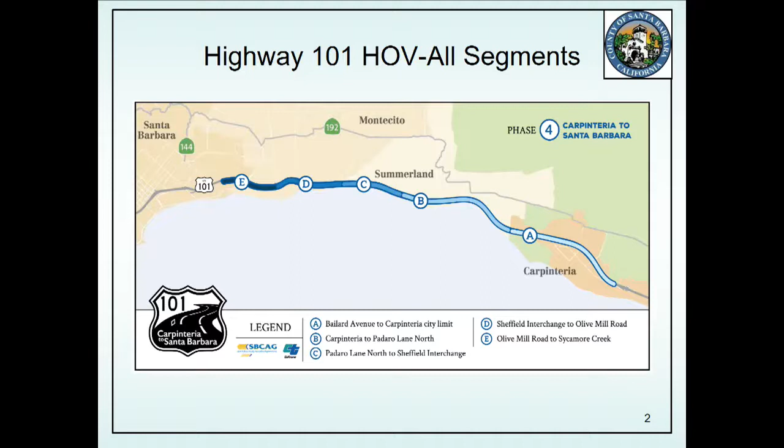Thank you. So I see we have staff here, and that would be our next step for a staff presentation. Good morning, Chair Bridley, members of the Commission. I'm presenting the Highway 101 widening project today. The project consists of two segments, specifically segments B and C of a larger Highway 101 widening project, which extends from Bailard Avenue to Sycamore Creek. So what you'll see on the slide here is the full extent of the Highway 101 widening, but today we're looking at just segments B and C. The project includes the addition of both north and southbound HOV, or high occupancy vehicle, lanes from the City of Carpinteria boundary heading southbound and just past the Sheffield interchange heading northbound. This slide shows both segments B and C.

The purpose of the proposed project is to increase roadway capacity and to reduce peak hour travel times. Currently, motorists experience 2 to 4 hours of delay during peak travel times, and that delay is projected to reach up to 10 hours by 2040.

The project also incorporates bicycle and pedestrian improvements to support multimodal travel and coastal access.

Widening of the highway will occur almost entirely within Caltrans' right-of-way, and the widening will occur either inward towards the center median or outward from the existing travel lanes in order to preserve ocean views and vegetation and to minimize grading to the maximum extent feasible.

The Highway 101 widening project was conceived of more than 20 years ago, and over the last 20 years, extensive outreach, including over 100 public meetings, have occurred in order to garner public input.

The project is a key component of the 101 in Motion plan, which consists of multiple elements that together would implement a multimodal strategy to accommodate future travel demand while facilitating a modal shift to carpooling, transit, and passenger rail.

In 2019, the Board of Supervisors approved a local coastal program amendment to address wetland impacts and policy inconsistency that was known would occur as a result of the 101 widening project. The amendment allowed for the project to encroach into wetland and buffer areas in exchange for a number of balancing projects that would improve coastal access and pedestrian and bicycle facilities.

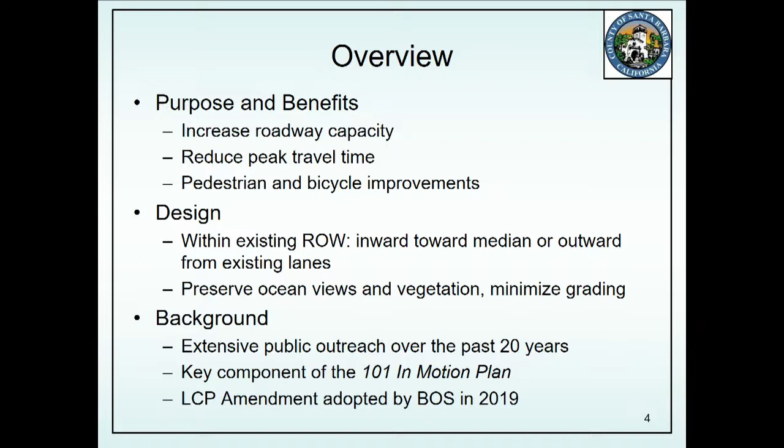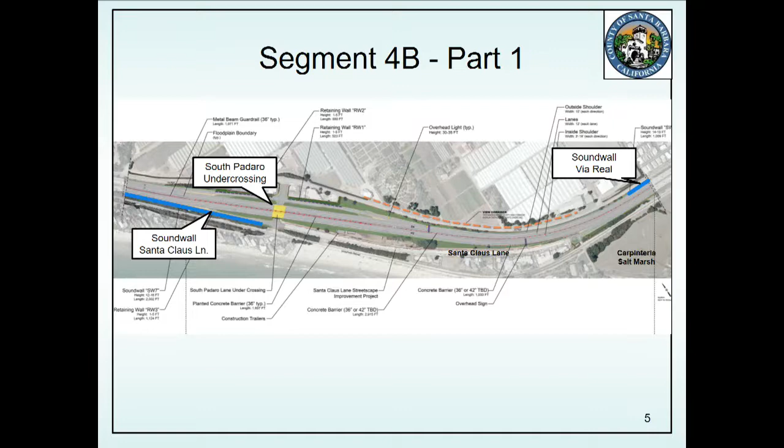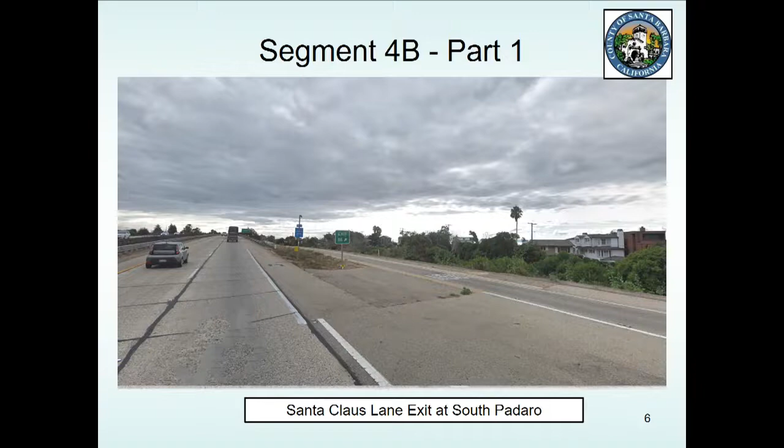This slide shows the proposed design for the South Padaro undercrossing.

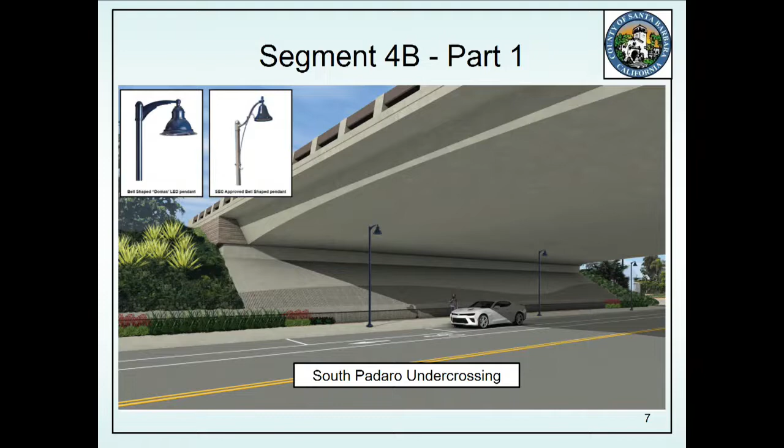In the next portion of segment 4B is the Arroyo Paredon Bridge improvement, another portion of the Santa Claus Lane sound wall, and another sound wall along northbound Highway 101. This sound wall is 1,300 feet in length and 12 to 16 feet in height.

This area also includes the Memorial Oaks design elements. The Memorial Oaks were planted to honor World War II soldiers, and some of the remaining Memorial Oaks will be removed as a part of the project.

Within the Memorial Oaks enhancement area, a unique median barrier and commemorative signage are proposed, along with planting of oaks propagated from Memorial Oaks.

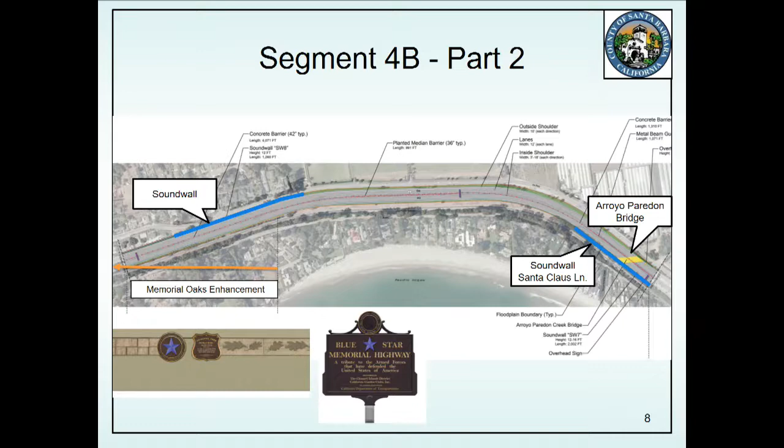The Memorial Oaks enhancement area continues onto the last portion of segment 4B. This section also includes Toro Creek Bridge improvements, a construction support area, and a portion of the 100-foot long, 12-foot high sound wall bisected by Caspia Lane and protecting Ocean View Park.

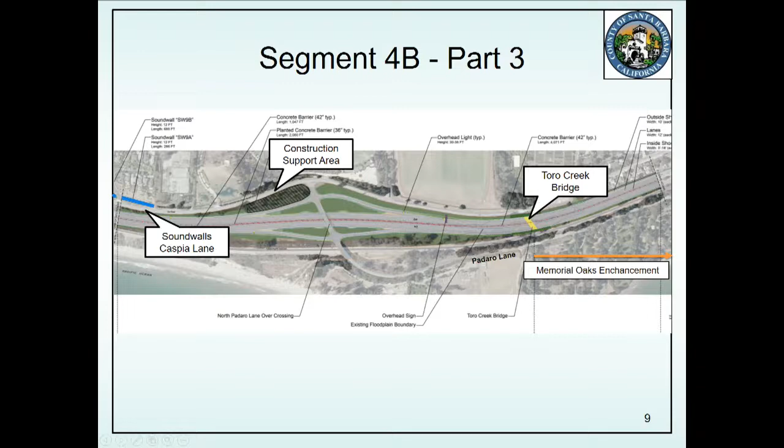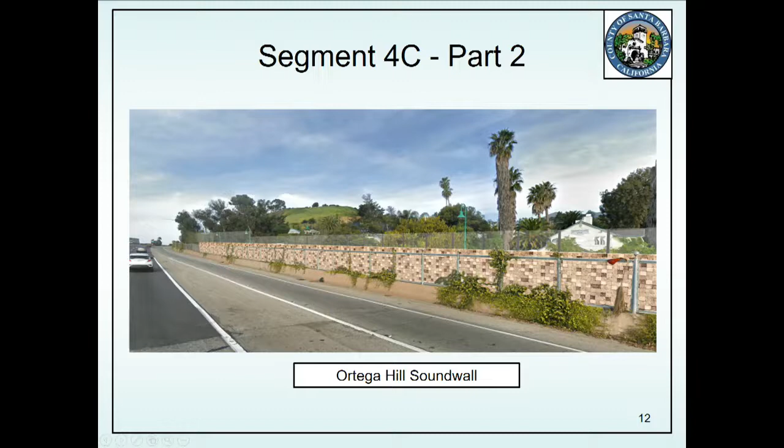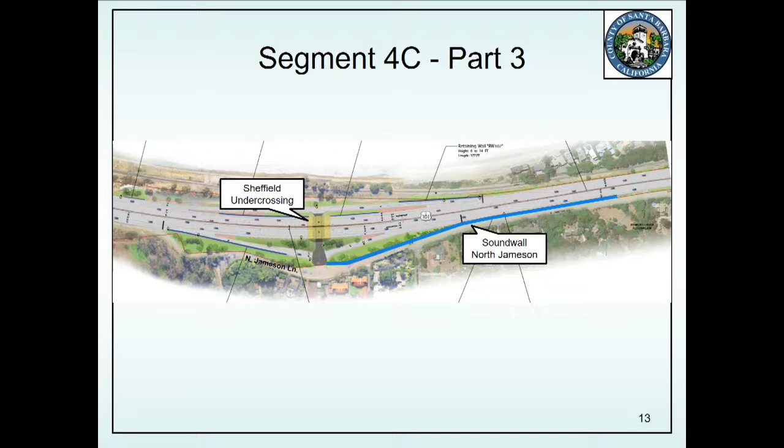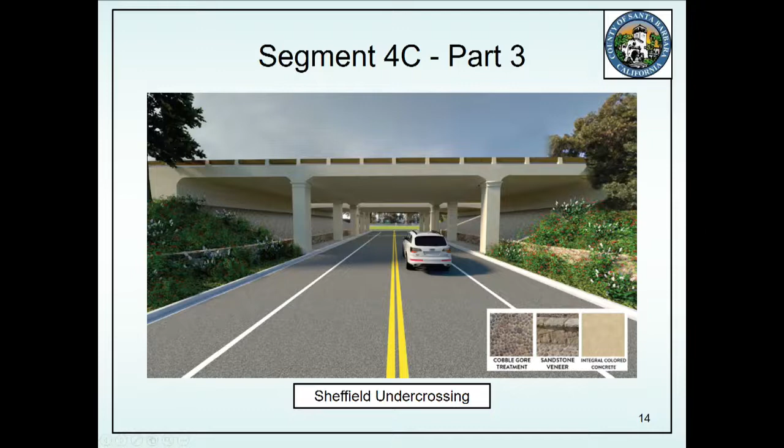And this slide shows the proposed Sheffield undercrossing. And here we see the view from the freeway near the Sheffield undercrossing before and after the proposed project.

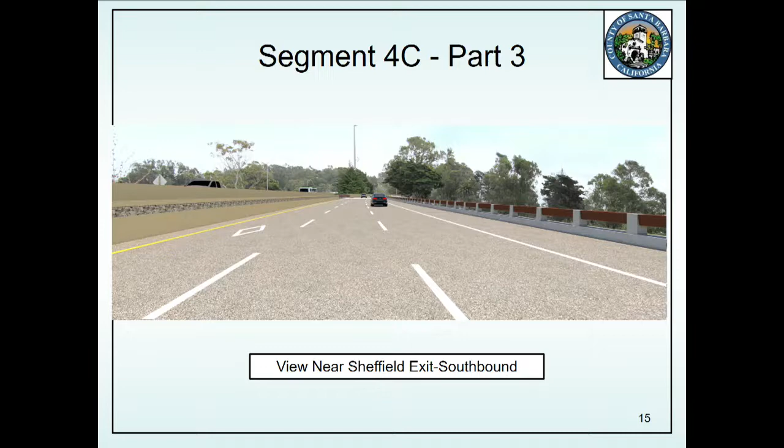The project includes consistent design elements throughout for median barrier and sound walls, and a unique treatment for the Memorial Oaks area, which are shown on the slide here.

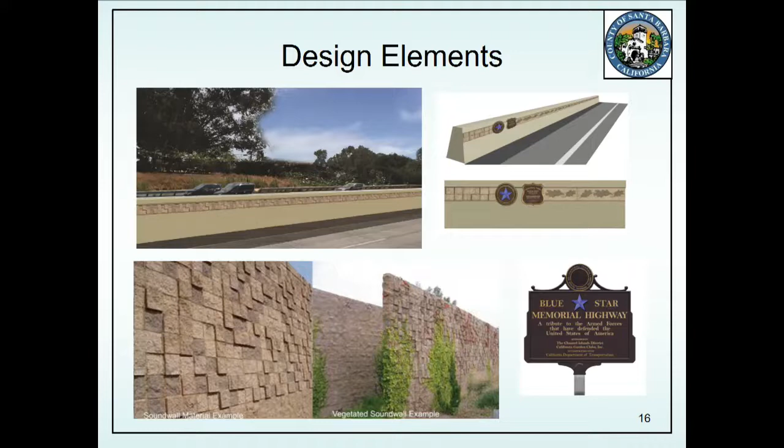Caltrans is the lead agency under CEQA for the proposed project, with the county acting as a responsible agency. Environmental review completed for the project included a 2014 EIR, which found Class 1 impacts in aesthetics, visual resources, and Class 2 impacts in biological resources, cultural resources, noise, paleontology, and water quality.

In 2017, a revised EIR was prepared, which found Class 1 impacts to transportation circulation as a result of impacts at intersections. And then in 2018, an addendum was prepared to address minor changes in the environment.

The EIRs in 2017 and 2014 included mitigation measures which have been incorporated into the project as conditions of approval. In addition, condition of approval 26 requires preparation of a mitigation, monitoring, and reporting plan to ensure compliance with the EIR mitigation measures.

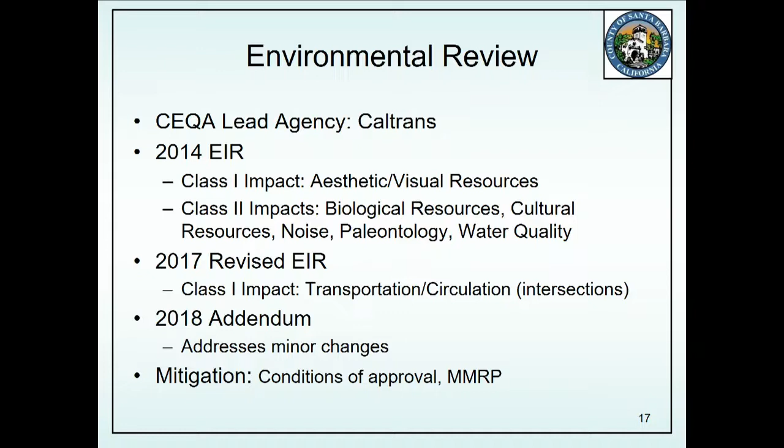I will now move into the consistency analysis discussion.

With regard to visual resources, policies require protection of public and coastal views, minimization of landform alteration, and design that is compatible with the surrounding area. The project would be consistent with these requirements because it would be confined to the Caltrans right-of-way in order to limit view impacts, landform alteration, and vegetation removal.

Select sound walls were eliminated in the review process in order to preserve public and coastal views, and certain sound walls are topped with clear panels, again, to preserve views. Finally, community-appropriate design and landscaping were coordinated with both the South BAR and Montecito BAR.

With regard to biological resources, policies require protection and replacement of oak, native, and specimen trees, and they also require a 100-foot wetland buffer. However, specific policy exceptions allow for wetland encroachment in association with the highway widening project.

The project is consistent with these requirements because it proposes tree replacement with trees of various sizes at a ratio of 3:1. Conditions require preparation of a tree protection plan to protect existing trees and guide establishment of new trees, and the project proposes wetland restoration at a ratio of 3:1. Finally, Caltrans prepared a mitigation and monitoring plan that details restoration and monitoring procedures for the restored wetlands.

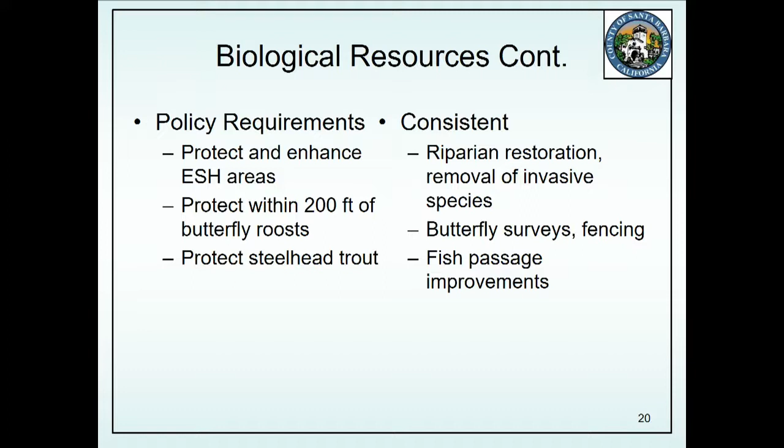The project would be consistent with these requirements because it includes riparian restoration, removal of invasive species, butterfly surveys and fencing to protect butterfly areas, and fish passage improvements associated with replaced bridges.

Specific policies pertaining to the balancing projects discussed earlier require completion of a specific list of coastal access and non-motorized travel projects, and require that the balancing projects be open to the public no later than the adjacent phase of the highway project. The project would be consistent with these requirements because the South Padaro and Evans Avenue balancing projects are incorporated into the proposed project itself.

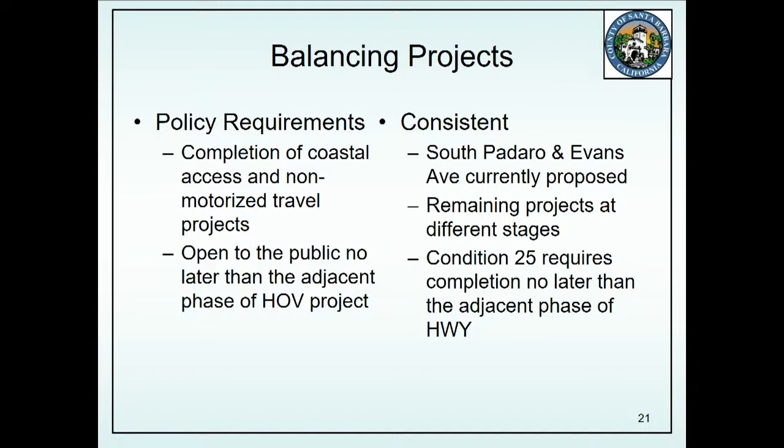The remaining projects are moving forward at different stages of design and the permitting process. Condition 25 requires completion of the balancing projects no later than the adjacent phase of the highway.

With regard to transportation and circulation, policies require that roadways and intersections, generally, with a number of exceptions, should operate at level of service B, and that overpass improvements should accommodate bicycle facilities.

The project would be consistent with these requirements because the existing level of service for Highway 101 at peak times is level of service F, and many intersections currently operate below level of service B and are projected to worsen by 2040. With implementation of the proposed project, there would be an overall improvement to level of service at intersections and roadways, and projected 2040 conditions would improve.

Finally, the project incorporates bicycle improvements at the South Padaro and Evans Avenue undercrossings.

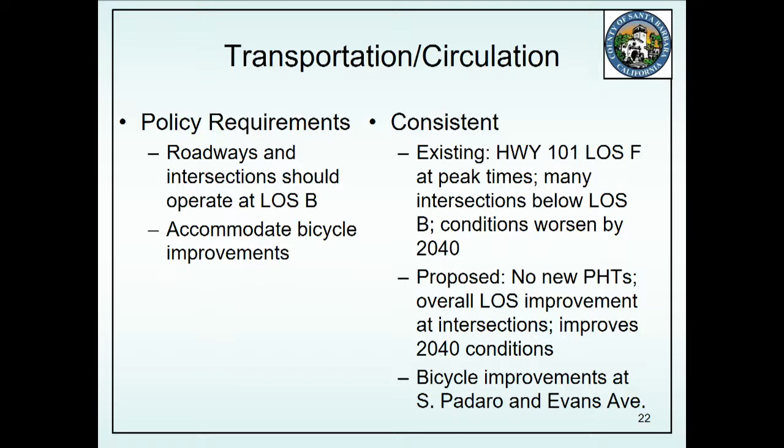With regard to water quality, policies require that the biological productivity of coastal waters be maintained, that degradation of water quality be avoided, and that the projects do not cause or contribute to flood hazards.

The project will be consistent with these requirements because it incorporates low-impact development strategies to minimize runoff, includes permanent and construction best management practices such as compost incorporation and the use of willow cuttings to facilitate infiltration, includes a stormwater control plan, and does not contribute to flood hazards. Finally, the replaced bridges allow for increased flow capacity and infiltration.

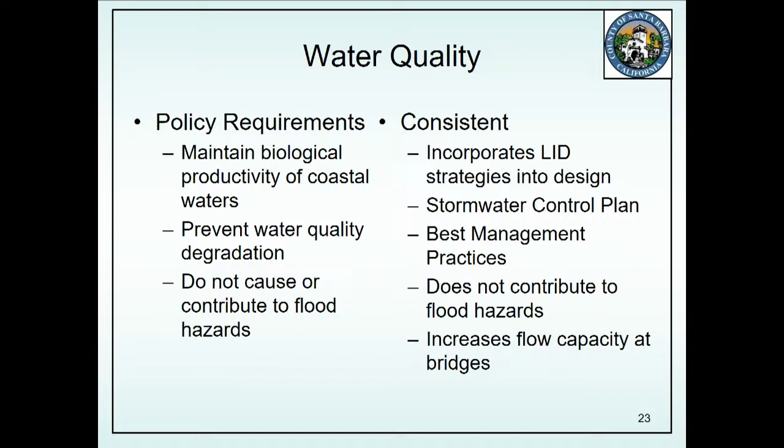With regard to cultural resources, policies require avoidance of sites if feasible and consultation with Native American representatives. The project would be consistent with these requirements because it avoids cultural sites, uses exclusionary protective fencing, and conditions of approval require both archaeological and Native American monitoring.

With regard to noise, policies place a 65 dBA limit for noise-sensitive uses. The project would be consistent with these requirements because noise contour maps show that many properties near Highway 101 currently exceed 65 decibels, and the proposed project includes noise attenuating elements, including sound walls, noise attenuating pavement, and funding for acoustical treatment of homes.

The project would be consistent with applicable ordinance requirements as well. It is within the Transportation Corridor Wetland Overlay, which requires wetland restoration and stormwater management, and as previously discussed, the project includes wetland restoration, including a mitigation monitoring plan and stormwater management plans.

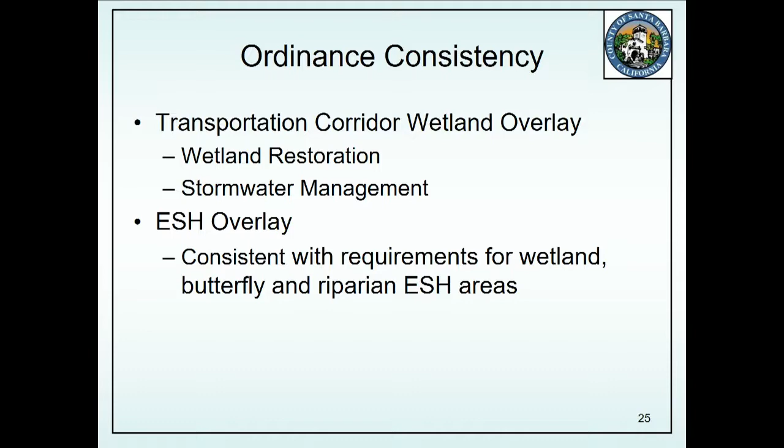The project is also within the environmentally sensitive habitat overlay, which specifies protection of specific biological resources. Again, as previously discussed, the project would be consistent with these requirements for protection of wetland, butterfly, and riparian ESH areas. For all of these reasons, staff is recommending approval of the proposed project.

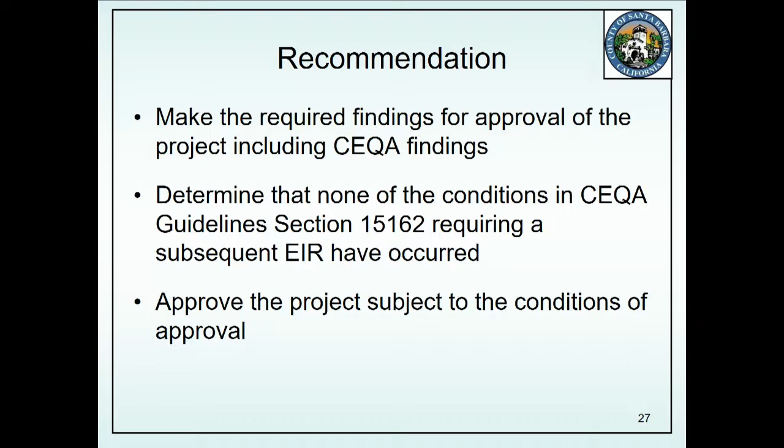Therefore, staff recommends that your commission make the required findings for approval of the project, including CEQA findings, determine that none of the conditions in CEQA guidelines section 15162 requiring a subsequent EIR have occurred, and approve the project subject to the conditions of approval as modified in my presentation today. I do know the applicant has a presentation they'd like to provide that includes additional details on the proposed project. That will conclude staff's presentation. Thank you.

Thank you, Ms. Liu. And so we have our applicants, and you can introduce yourselves and take it from there. Thank you, Chair Bridley and Commissioners. I'm Fred Luna. I'm with the Santa Barbara County Association of Governments, and we're a project sponsor with Caltrans on the project. I'll let our other team members and presenters introduce themselves.

Madam Commissioner, members of the board, my name is David Emerson. I'm with Caltrans. I'm the project manager. And good morning, my name is Zach Sevilla. I'm with Mark Thomas and Company, a design consultant hired to advance the design on many portions of the 101 project.

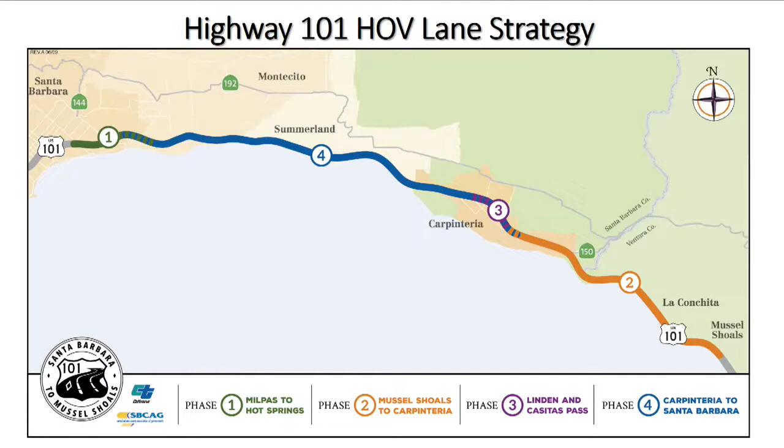Then in 2006, with the passage of Prop 1B, there was an opportunity under that bond to get a project built in partnership with District 7 and Ventura County Transportation Commission to add the first HOV lanes in Santa Barbara County, 6 miles from Mussel Shoals up into Carpinteria. That was funded and approved and built and completed in 2015. So that added the 6 miles, and that left that middle section, phase 4, which is 11 miles long.

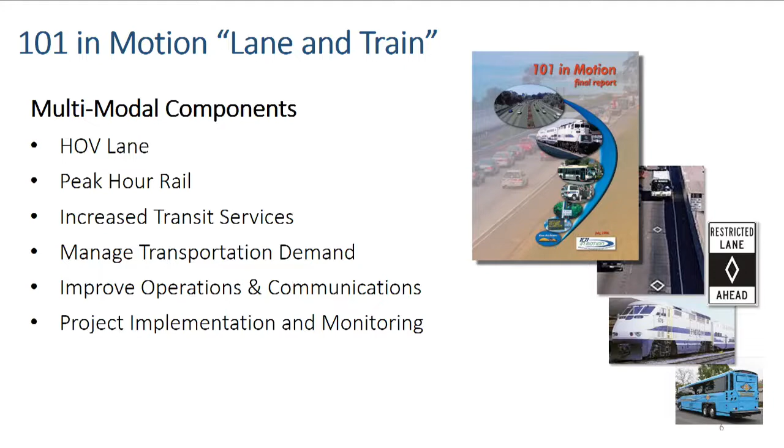The history behind that really stems back to what Ms. Liu had indicated, 101 in Motion. Before Caltrans started the environmental document, we knew there were multiple strategies and alternatives that people would want to see to improve congestion in this corridor. So 101 in Motion was a broad team of Caltrans, SBCAG, and local officials that got together to look at a number of different congestion relief strategies that resulted in these components that were part of the overall solution to resolve long-term congestion relief in the corridor: the HOV lane, peak hour rail, transit services, and transportation demand management and other operational improvements.

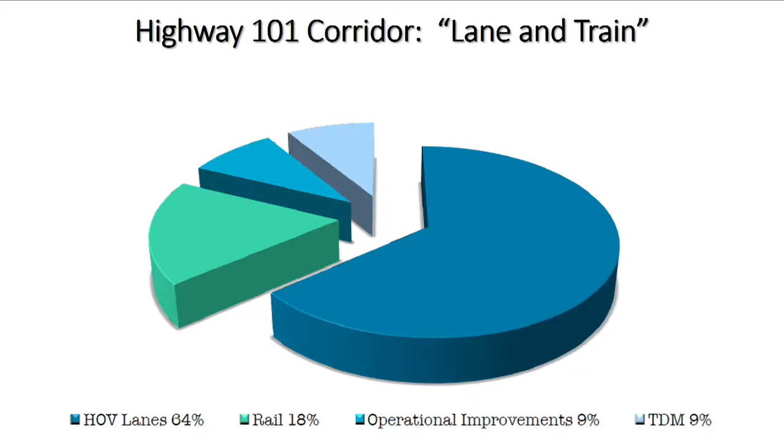With that overall strategy for congestion relief in mind, we had a number of different projects that we could present to voters, and that was done in 2008 in the Measure A ordinance that went to the voters and was approved at a 79% approval rating. That was one of the highest approval ratings for a transportation sales tax initiative at that time, and still is one of the highest. The strategy was that Highway 101 was a regional project, not just a South Coast project. It's an interregional corridor, and right off the top people could see that our objective is to solve congestion on Highway 101. The voters approved $140 million in 2008, approximately 14% of the total revenue that was to be collected.

With Measure A passed, and at about the same time, Caltrans initiated a multi-agency project development team. Building on the relationships that occurred during 101 in Motion, we continued that with Caltrans, working alongside City of Santa Barbara, City of Carpinteria, and county staff to put together a project development team that would develop the environmental document for the project. This required extensive technical studies in the corridor and broad community outreach that built upon the outreach done during 101 in Motion as well.

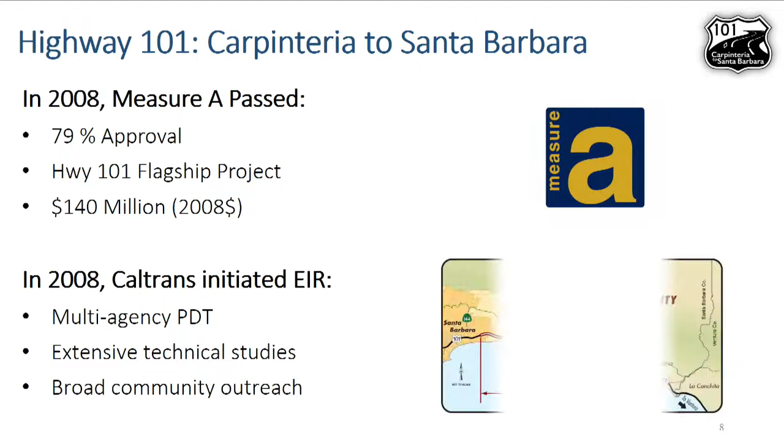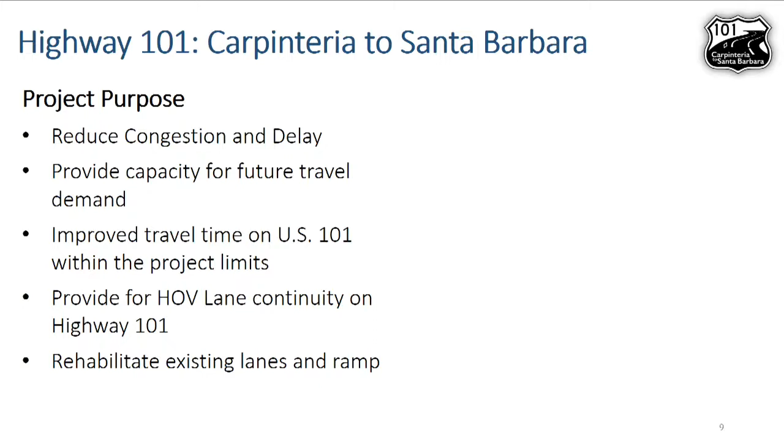Ms. Liu indicated some of the project purposes, but overall: reduce congestion and delay, capacity for future travel demand, improve travel time within the corridor, HOV lane continuity to continue what was built with the Mussel Shoals project to the south, and rehabilitate existing lanes and ramps. That was something added later based on the addendum that Ms. Liu indicated, to provide full concrete paving across all 3 lanes for a long-lasting surface, so that we don't have to go back and maintain that facility over and over again.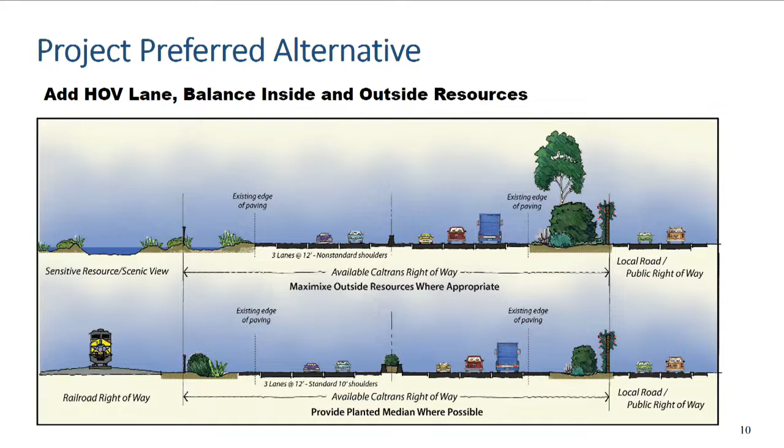That essentially was the alternative that was selected, the hybrid alternative, which took into account what resources in that particular area are being most affected by the project, minimizing that impact by selecting either inside or outside widening depending on which area we're in. As Mr. Emerson and Mr. Saviglia go through the details of the project, you'll be able to see how that manifests itself in the design.

So now we're moving forward with implementation, and this is our 5-phase strategy. Overall, 101 is about a $700 million project, and early on we knew we couldn't build it as one construction contract. Plus, we have 3 jurisdictions where we need coastal permits from - the entire project's in the coastal zone. So we broke up the project into 5 distinct segments.

One in the city of Carpinteria on the south, one in the city of Santa Barbara on the north, and then the 3 in the center were in the county's jurisdiction. We broke those up based on different geographic areas and somewhat related to the different community plans we would anticipate having to present the project on, based on different policy issues.

Specifically before you today are the 2 segments that are in the county, 4B and 4C, which we're calling the Padaro and the Summerland segments. These are fully funded - SBCAG and Caltrans were able to get money from Senate Bill 1 and statewide SHOPP money, which is Caltrans rehabilitation and maintenance money, to fully fund these projects. Segment 4A in the city of Carpinteria is about to start construction in April. Segments 4B and C, the design is well advanced, and segment 4C would start construction in October, pending approval by this body, and 4B in 2021.

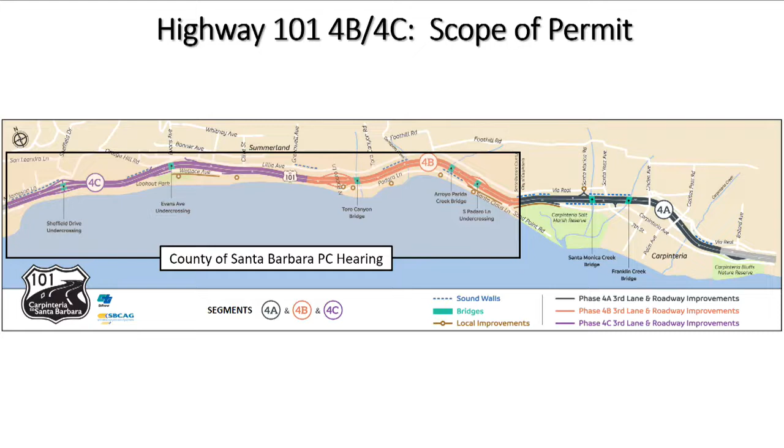Our presenters will get into more details, but this is a high-level view of some of the features in those 2 segments. In segment 4B, the Padaro segment, we have the Padaro and Santa Claus Lane undercrossing that will be entirely replaced and redone. In the Summerland segment, we have the Evans Avenue undercrossing, and going over Ortega Hill, we also have the Sheffield interchange, which will be completely reconstructed, including removal of those left-hand ramps, as Ms. Liu indicated.

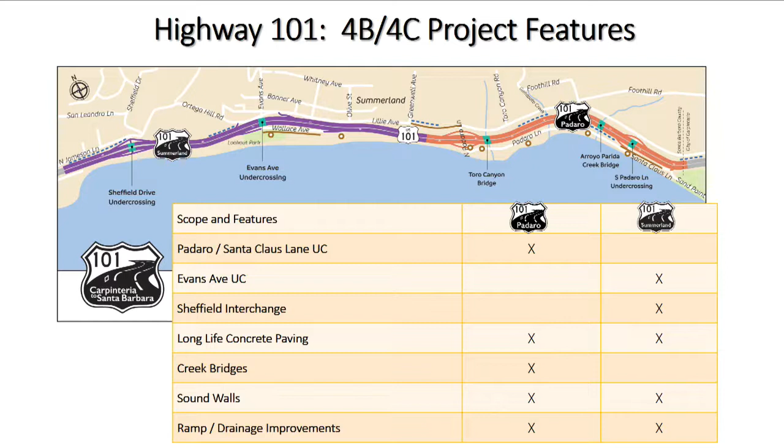Then we have the long-life concrete paving that I mentioned before, which is funded so that it's a much more sustainable project. We have creek bridges in the Padaro segment at Arroyo Parida and Toro Canyon Creek. We have sound walls throughout, which will be described by our presenters, and then ramp and drainage improvements throughout.

I want to spend a little time talking about our balancing projects, building on what Ms. Liu indicated as the local coastal program amendment and the balancing project. Caltrans and SBCAG took to heart the direction through the LCPA to work with the agencies. We got those funded - the good news story takeaway was that those projects were included in our application package for statewide money, and they're, for the most part, all funded.

The Santa Claus Lane Bikeway project is fully funded through construction. SBCAG's the lead on that project through the environmental phase. An environmental document is about to be approved, and we will commence detailed design fairly shortly. The Santa Claus Lane Streetscape project, the county's been leading through environmental - they've gotten project approval and environmental approval as of last year. SBCAG voted funds for the county to continue on the design, and we have an agreement with the county through a memorandum of understanding to continue that project forward.

Then the next 3 projects are smaller projects included in our Senate Bill 1 ask for money. They're fully funded through all phases of development: Padaro coastal access signage, and a sidewalk improvement from North Padaro down to Loon Point Park. There's also a restroom facility at Loon Point, currently not funded through Senate Bill 1 money, but it could be funded through other sources, and if there are questions, I'd certainly be able to elaborate on that.

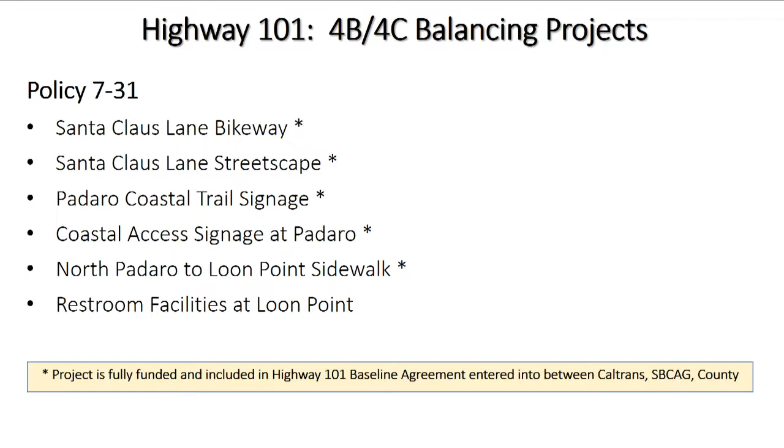Moving on, Policy 7-32 addressed some additional projects. The first two projects are at South Padaro Undercrossing and Evans Avenue. Those are integral to the highway improvements, so they're not separate projects. They'll be built with the highway improvements and are fully funded as well.

Via Real is a multi-use pathway in the community of Summerland between Greenwell and North Padaro. Along Finney Road there were coastal access improvements, and along Wallace Avenue the local coastal program amendment described coastal parking being improved in that area. Those are projects we currently meet on monthly with county staff to review progress.

Environmental review is done on those projects, so detailed design could commence at any point. The last four projects relate to improvements at Lookout Park, which, based on a recent report, the county's Community Services District has significantly improved. There's also a short eucalyptus gap closure in the sidewalk along Eucalyptus Lane on the coastal side, where no work has been done yet, but we imagine it would start when our work on the Montecito segment begins.

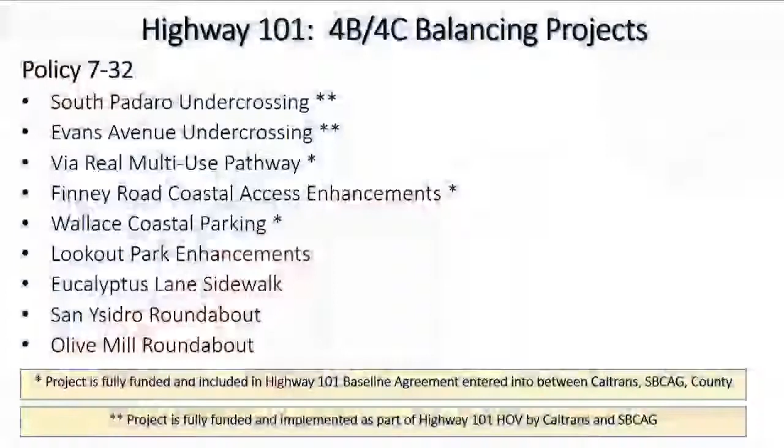On San Ysidro Roundabout and Olive Mill Roundabout, the county and the city of Santa Barbara have been participating in meetings and advancing the project, and they're nearing project approval and environmental clearance. Those will be included in SBCAG's plans. This year is an opportunity to fully fund the entire corridor, and Caltrans and SBCAG will include all those unfunded projects in our request for statewide money.

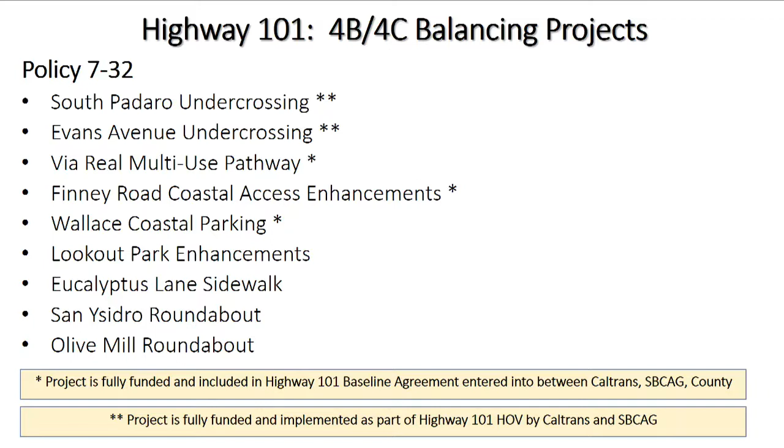This is my last slide, just to describe our process for public outreach as we coordinated through the coastal development permit process. That commenced with early coordination with county staff on developing what would be in our application and the start of the design review team process, which began in April of 2018.

We had about 15 design review team meetings upstairs here, going through all the details of the project for the 5 miles, from bridges to sound walls to a number of other elements. At two different steps along the process we had stakeholder outreach, checking in with the design review team as decisions or recommendations were made, presenting things to the community, getting feedback, and bringing that back to the DRT. Then we summarized the final design review.

We finished our application process and then started the BAR process simultaneously, which was conducted in the spring and summer of last year through the fall. There were a number of meetings during that time.

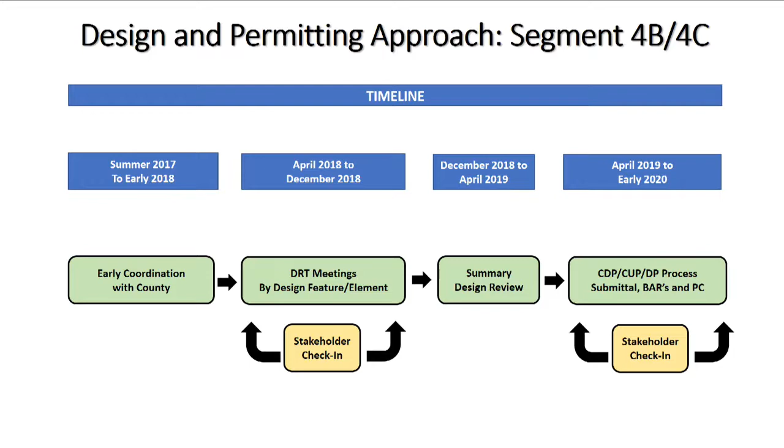If there are any questions, we have a quick reference guide that we've handed out to you, which talks about all of the public outreach we've conducted, the BAR process, and, in our view, how this project is consistent with the policies of the county on a summary level across the different resource areas.

So I'm going to hand it over to Mr. Emerson, and he's going to talk about the project guiding principles. Thank you, Fred.

I'll start with our guiding principles, which were established when the PDT was first formed in the early 2000s. As Fred indicated, we studied a number of alternatives, including ones with a full 10-foot median planting through the whole corridor. That exercise showed us the impacts associated with that: the freeway moves out, starts to impact the frontage roads, and impacts private property, becoming very expensive. So the project team recognized early on that we needed to focus on alternatives that were financially viable.

In addition to that, or in combination with it, was the thought of minimizing the take of private property. We recognize we have a narrow right-of-way corridor here, but we have enough room to add the HOV lanes without necessarily taking undue private property.

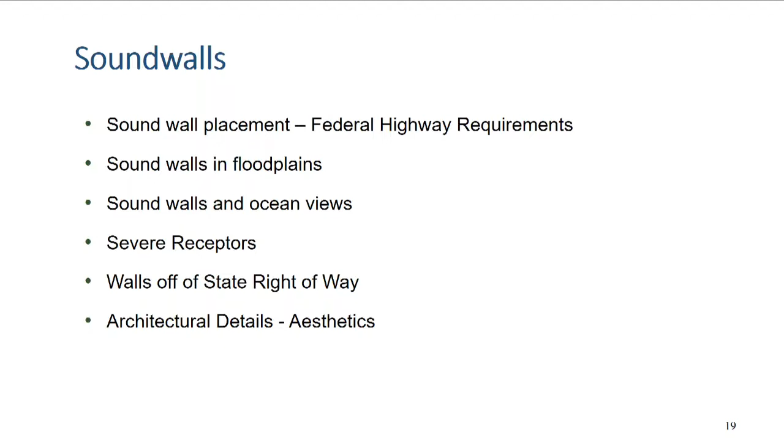I'll demonstrate that with a wall location. There's a couple of occasions where the sound walls occur off of the state right-of-way, so we'll touch on that. And lastly, I'll talk about the architectural details associated with each group of sound walls.

So this is what we call our user-friendly plans. Ms. Liu showed this, and I'll just replicate what she demonstrated and add a little detail. Can I have the pointer there, Fred? Is there a pointer on this? There's a pointer on that one. They have a little red bar.

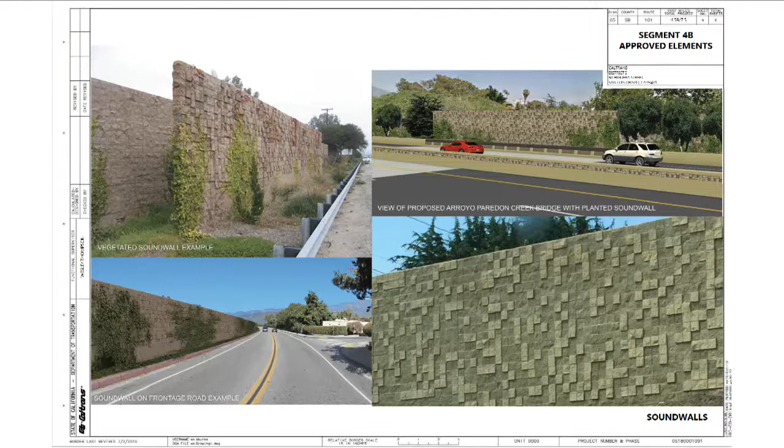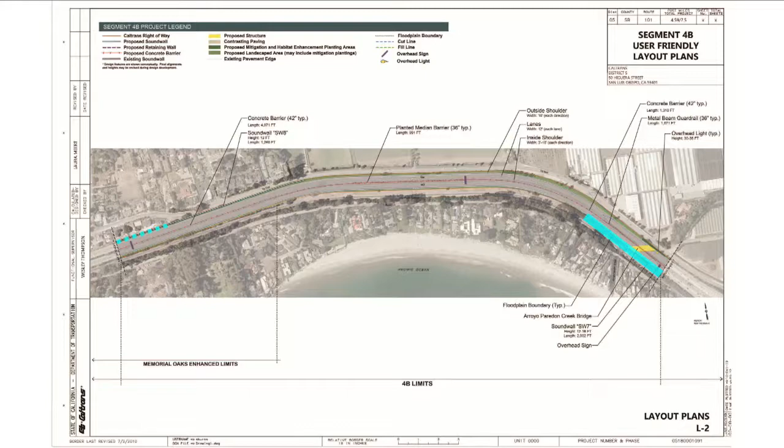Back here, this dashed line is the existing sound wall at Toro Canyon. It's the staggered sound wall with the in and out block texture, which we're repeating, and we'll be extending that to cover the rest of that neighborhood. So here's a visual of this, similar to the wall we have at Salinas down by the tennis courts. This has floodgates in it to allow flood flows to flow through the wall if ever needed.

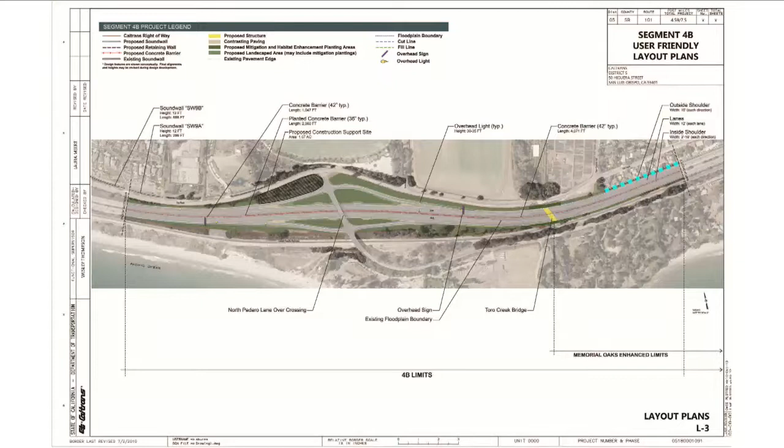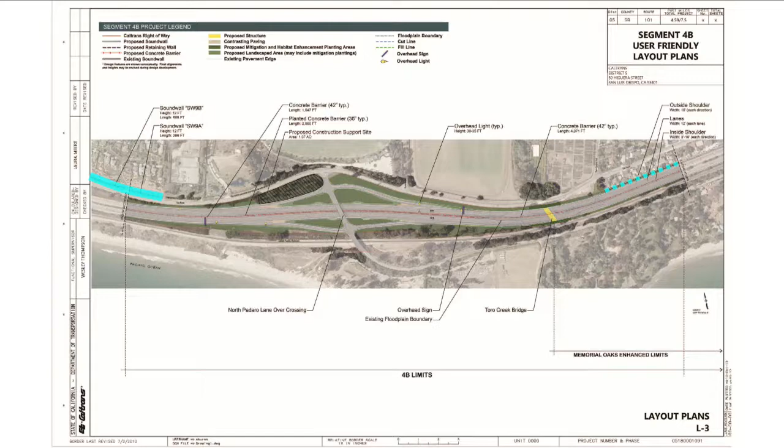Again, moving northward, this dashed line is the extension of that existing wall again. Then here's the wall at Caspia Lane, protecting the Summerland cottages and Ocean View Park. Ocean View Park is a severe receptor, so we've taken extraordinary measures to make sure that wall provides attenuation to this park - it's a public space. So you'll see the footprint of the wall here, protecting the park as well as the neighborhood above it.

It's a 12-foot high wall. Half of the wall is the CMU wall with concrete stone veneer, sandstone veneer on it, and the top half of it is these clear plexiglass glass panels. This wall will be maintained by forces other than Caltrans - it's maintained by the Summerland Cottages Association, but the wall itself is on county property. You'll see the equestrian trail still exists behind the wall.

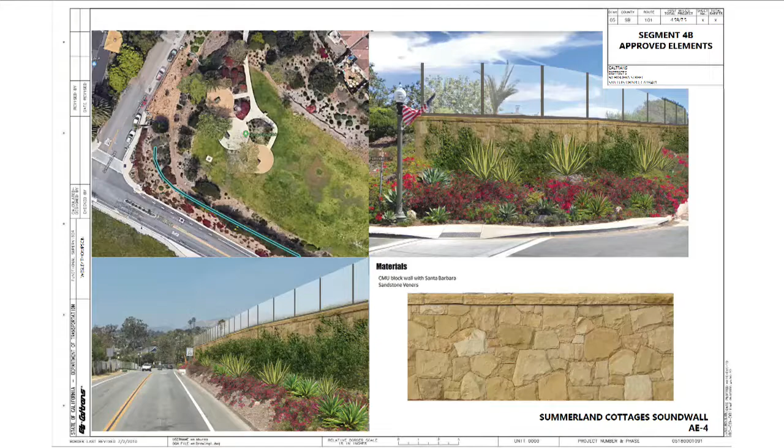This is a view from Ocean View Park, looking out to the ocean, taken from a seated position at one of the benches. You can see how that ocean view is really a prominent feature in this park. In fact, when the wall is built, it actually enhances that view a little bit. Right now there are some hedges that block a little bit of the view, which I think was to give the park some privacy and sound attenuation. With this wall, that won't be necessary, so now you get a much larger, expansive view from the park.

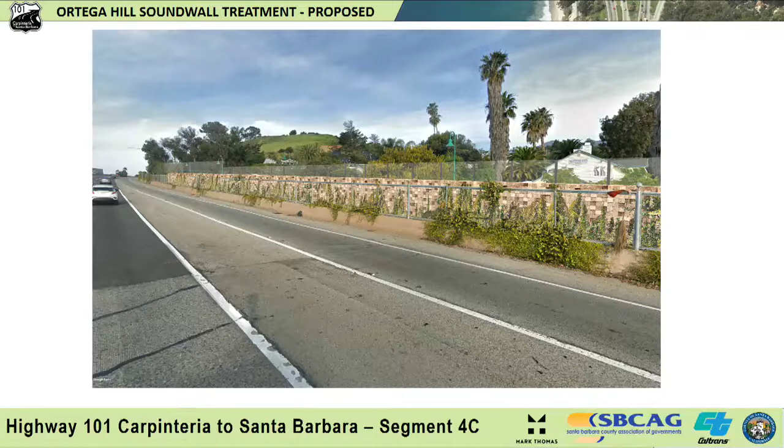The next wall is the Ortega Hill wall, protecting this neighborhood right here. Again, I won't repeat Miss Lou, but essentially it's a 14 to 16 foot wall, and the top portion is clear. This wall happens to be on Caltrans right of way, so it needs to adhere to Caltrans standards as far as being exposed to traffic and pedestrians.

So we're not using the stone veneer in this instance. This is the similar in and out block texture that we have in other locations, and we have vine planting to deter graffiti. The reason the clear panels are up so high on this wall is that we want to make sure that this particular bike path, which gets a lot of pedestrian traffic, is addressed. In an attempt to deter graffiti and reduce maintenance efforts, we want to put that clear glass panel up a little bit higher so it's away from the hands of potential vandalism.

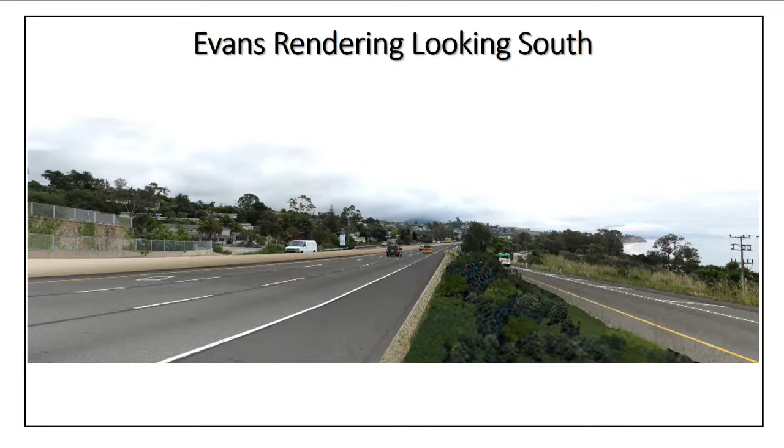The final wall is at Evans Interchange. It's this long wall here, 10 feet tall, and you'll notice that this wall is also on the edge of pavement. So this is a rendering of how that wall looks. We've installed a concrete barrier at the base of the wall, offset a few feet, so that we can provide a planter pocket in between the two. Again, that wall's in the back here.

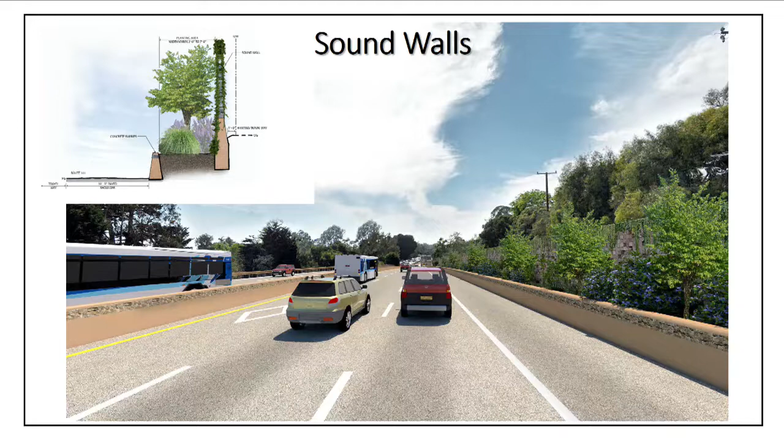From the residential street side, that wall is pretty close to the pavement, and in fact it's on the pavement. We need to maintain the bicycle facilities in this area, so the vines are planted on the freeway side, and there are holes cored through this sound wall so the vines can grow through and establish themselves on the back side. The image up in the corner is an example of that. I believe that's from, it looks like, Santa Maria.

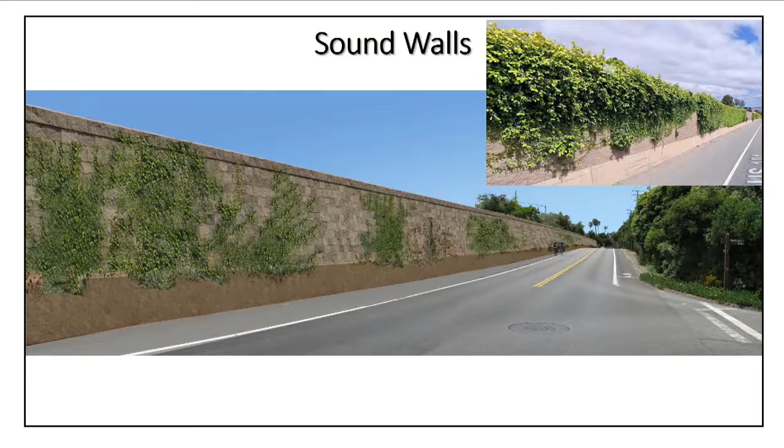By default, the barrier is 42 inches high, except where there are planted medians or ocean views. In that case, the barrier goes down to 36 inches to allow ocean views, and because we don't need the extra height there, the planting provides that separation. So the 42-inch barrier gives you a little separation between opposing traffic, and in the case of the planting, that accomplishes that, so we don't need the extra height on the barrier.

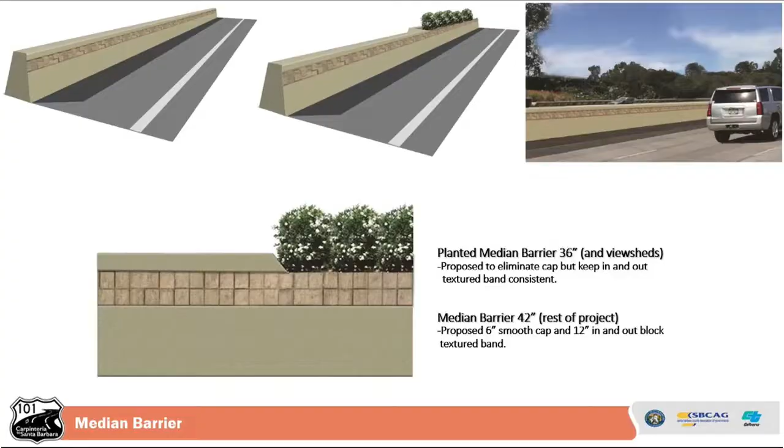So what we've come up with is a sandstone cobble sort of texture with a colored grout in between, and it's flat. So it is drivable, but it's not intended to be a drivable surface. Instead of ending with an abrupt edge, it has a gentle arc and a curve to give it more of a natural appearance and blend in with the landscape.

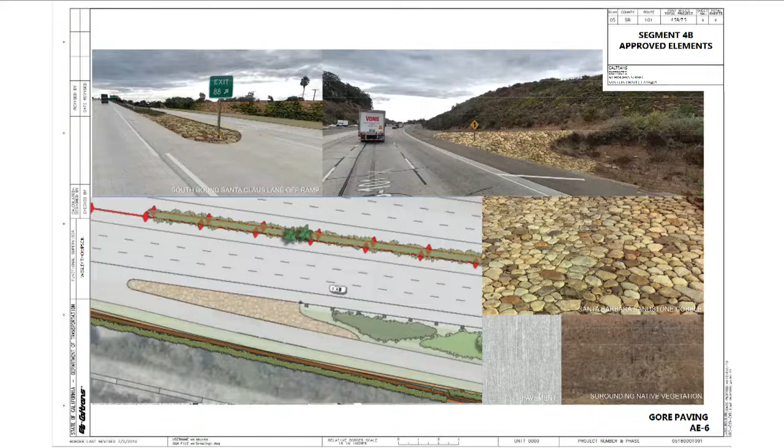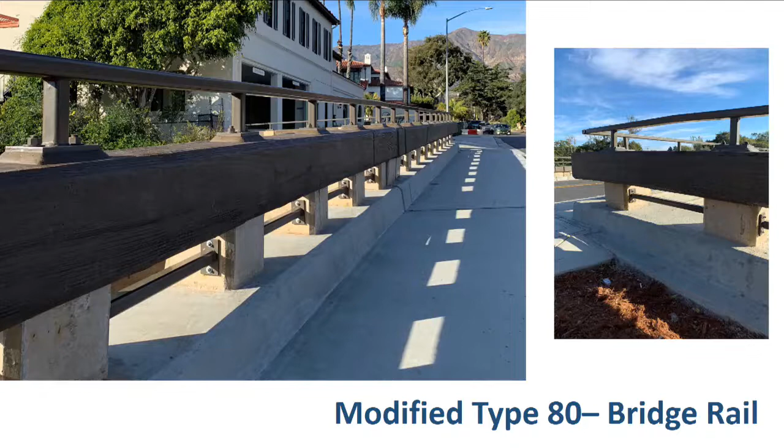You'll recognize the modified Type 80 bridge rail. This is a picture of Olive Mill. It's a concrete barrier with this heavy wood textured beam that's stained to look like a beam, reminiscent of the bridge rails in the corridor. That's another consistent element that shows up on all of our structures.

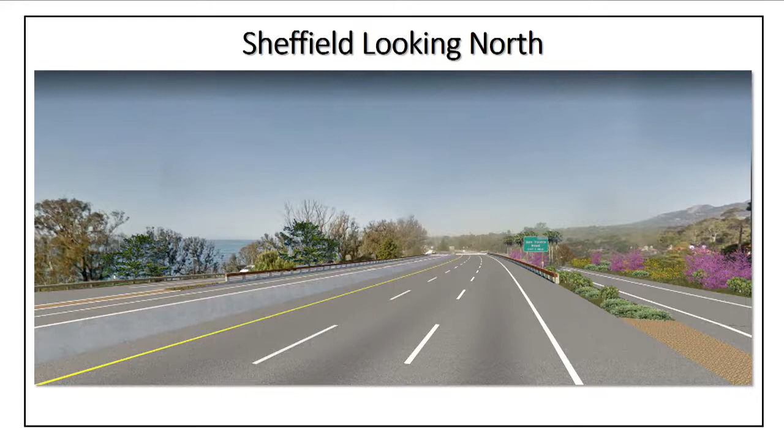This is a view of that from the Sheffield interchange looking north. You can see the Type 80 on either side, as well as on the south. This also allows ocean views where the barrier is up against the ocean side of the freeway.

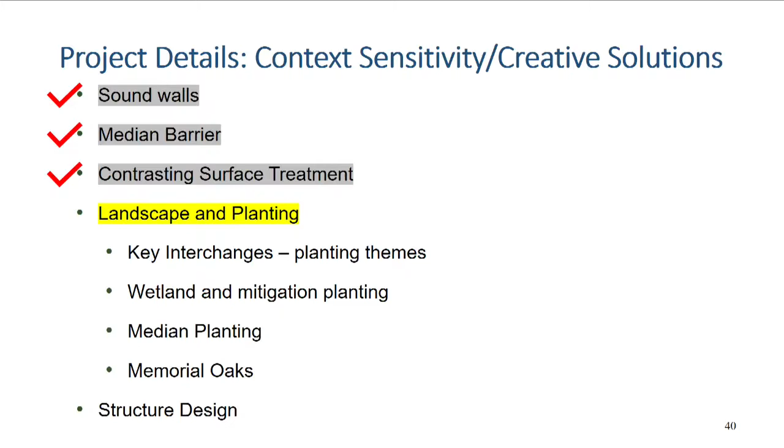Okay, so I've talked about some of the more hardscape elements. I'll focus on the landscape planting now. I'm going to focus on 3 distinct interchanges: the South Padaro interchange, the Evans interchange, and Sheffield. These areas are where the planting tends to be the widest, so we're able to create the most impact with our planting concept. So I'll show you a before image of the South Padaro.

Everyone I'm sure recognizes this. As you're driving southbound, this is one of the few opportunities in the corridor to actually see sandy beach and see people on the beach playing and check out how the waves look and the recreation that's happening. So the goal with this is to provide - you'll see the palm trees as well. We're building off the palm tree theme here in this instance.

The county has one of the balancing projects that the county's leading: this extensive parking that's being added here along Santa Claus Lane, along with the crossing of the railroad tracks. So we're going to be able to see all of that activity take place. The planting will blend in with that sort of a feel. So this is a planting blow up of this interchange, showing the palm trees and a lot of flowering native trees as well.

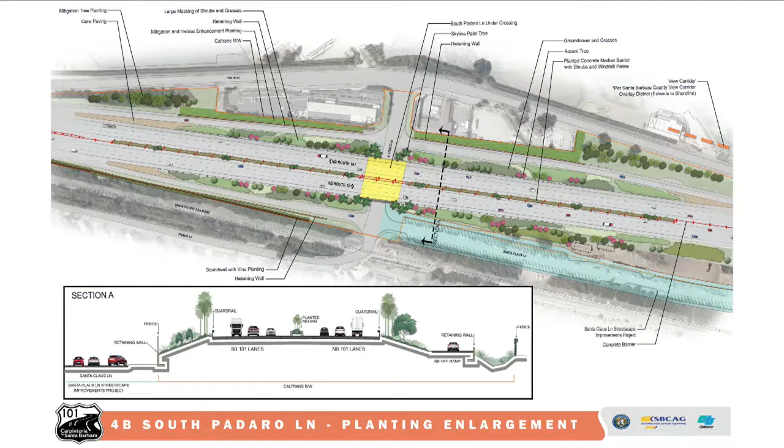The next interchange is Evans Avenue. Very similar in the fact that it's used to access the beach. However, the difference is this is actually located in a little downtown of Summerland. So this gets a lot of daily use by people in the community walking from their homes to the beach and access the park. You'll see right now we've got parking underneath the structure. Zach will go over in detail how these details are handled structurally, but from a planting perspective, you can see this is quite a bit different than the South Padaro neighborhood.

The South Padaro is more of a day use. This is more of an all-the-time-in-your-community feature of the neighborhood itself. So the planting here reflects that by being more pedestrian scale, a little bit more ornate, a little more colors. Here's an example of that planting concept.

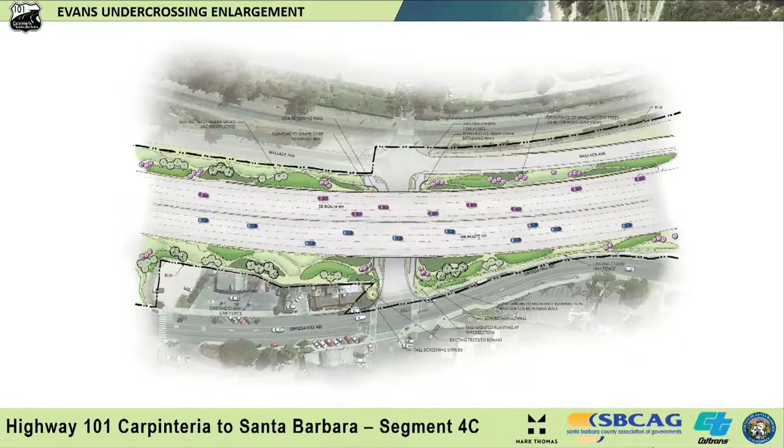Finally, the Sheffield interchange. The main difference at Sheffield is the distinct rural character of this interchange. No pedestrians are present at this one; this is only access to the ramps. But when you come into Montecito and you go over the Ortega Hill, the character is quite a bit different. It's much more wooded, much less palm tree oriented, heavy on the cypress, oak trees, that sort of thing. So you'll see the planting concept reflect that. There are palms included, but they're random and they're spaced out. The major component of the landscape, at least, is cypress trees and oaks.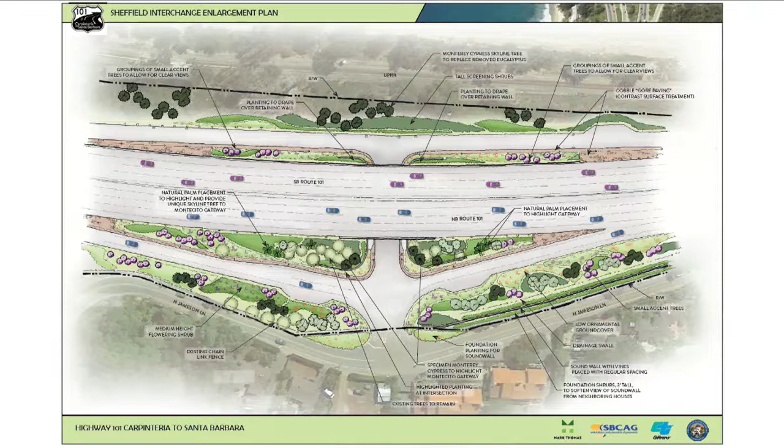You'll see the large-scale oaks here in the foreground. I'll touch quickly on the riparian planting. So we do have a couple of creek bridges. This is a riparian area, and there's some planting associated with that. As the freeway naturally drains to these drainages and these creeks, we're highlighting a different type of landscape. We're using riparian species like sycamore, redwood, alders - not redwood, but red bud, alders, poplars, and of course willow.

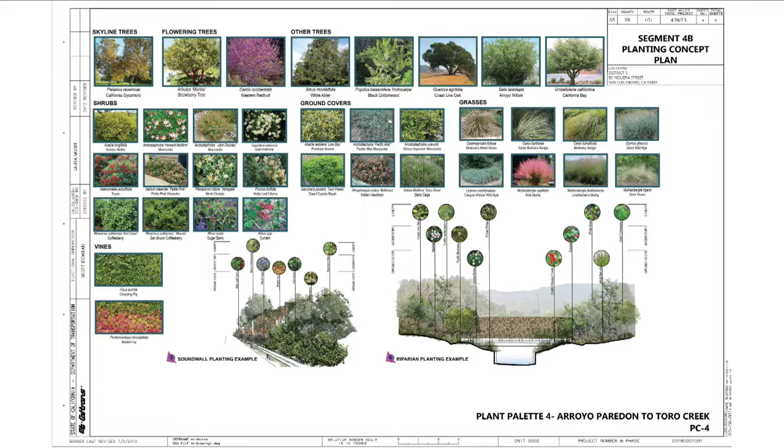Sorry, I'm experiencing a little delay.

This is the view impact analysis that was done for the community of Summerland. One of the unique features of Summerland is that it's this community perched on almost a natural amphitheater, with views to the ocean. So it's very important to the community that we maintain those views while recognizing that we do need to add planting to the area.

Each one of these cones is differentiated by the darkness of the blue or the red. The dark blue cones are full ocean views, and these are the viewer locations for these, and you can see how the cone is kind of centered on that. A dark blue is a full unfiltered ocean view, a light blue is a filtered ocean view, and of course the red is views that are already blocked by either trees or landform. So what we've done is made sure that our infill planting in these locations doesn't hinder these ocean views, but rather complements or accentuates where the view is already blocked.

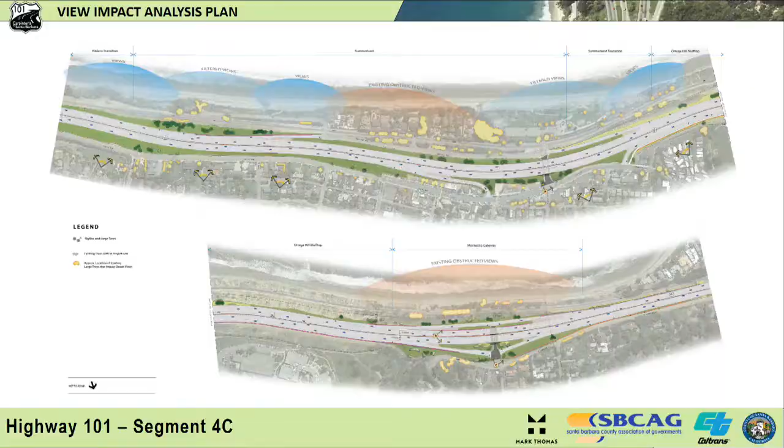With that, I'll briefly touch on the structure at South Padaro Lane. Again, we've got the Type 80. I'll go from the top down, pointing out features. The structure itself is arched, reminiscent of structures from the 40s and 50s. The abutments use a beach wood texture indicative of this particular region. A lot of the buildings in the Santa Claus Lane district have that feature associated with them.

On the slope paving, you'll see this relaxed wave feature incorporated to show some interest. There's a retaining wall whose purpose is to uphold the slope for the Class 1 bike path coming in off Santa Claus Lane, but it made sense architecturally to wrap that under the structure and repeat it on the other side for a continuous feature. Lighting is proposed underneath so this can be used at all hours of the day. There is parking underneath this bridge.

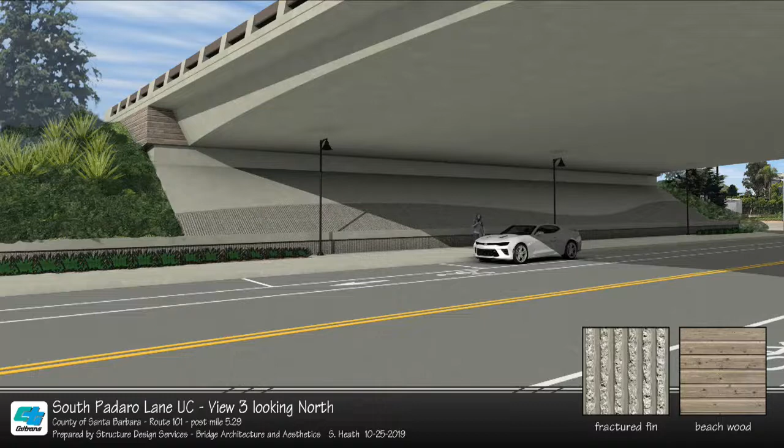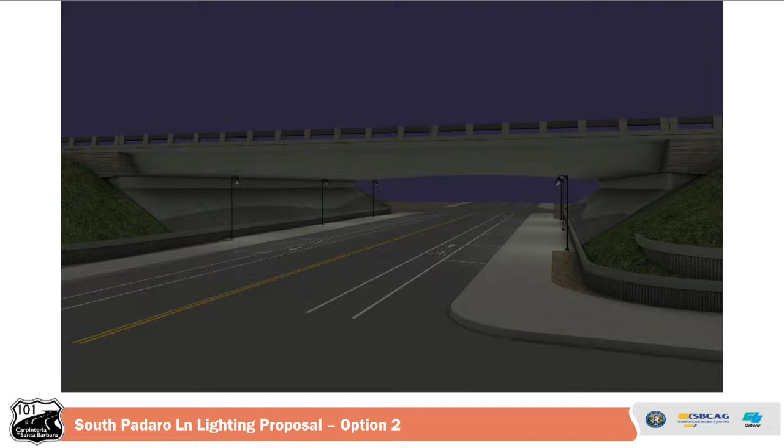This is another simulation of the same bridge. You see this planter, this low retaining wall with planting in front of it, which can extend to some degree under the structure itself. This is a simulation of this structure at nighttime, showing how the lighting is soft but yet present. This is a lighting model to show what the lighting looks like underneath the structure.

The main point here is that the color is kind of a solid green, which indicates a very consistent level of lighting. It's a relatively low level of lighting, but it's consistent. You won't see a lot of hot spots or bright spots.

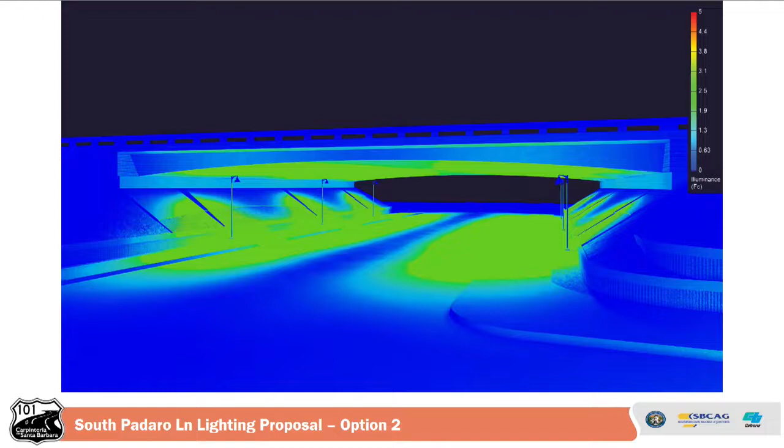Next, we have two creek bridges. These creek bridges are slab bridges. They're not very thick, which means there's not a lot of opportunity for architectural detail to be incorporated. Both creek bridges have either a local road on one side and the railroad on the other, at the same level. So they're not very visible, but we've incorporated the same Type 80 texture, the same color throughout the entire bridge, with a slight arched offset into the facade of the bridge itself.

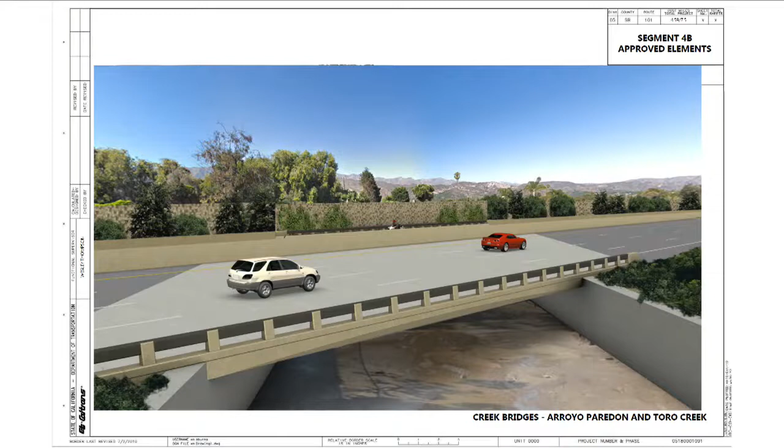The last bridge in segment 4B is the North Padaro overcrossing. We're not making any modifications to the structure as it's sound and doing its job as needed. We are, however, adding slope paving below the abutment, which reduces maintenance efforts from erosion and sediment removal. Essentially, this is an exposed aggregate finish. The intent is not to call a lot of attention to this feature, but to match the relatively simple architecture of the bridge and blend in with the natural surroundings.

With that, I'll pass it on to Zach to cover the 4C structures.

Thanks, Dave. As we start, we're looking at the Evans Undercrossing. This is that same view that Dave showed earlier, looking towards the ocean. One thing to note with the Evans Undercrossing is that the two existing bridges there today are not being replaced. There's an existing gap between the northbound and southbound structure, and the widening is just completing the deck portion in between those two structures. So the outside bridges are going to remain, which poses some challenges, but also some unique opportunities for aesthetic treatments on this structure.

One of the first things we wanted to incorporate is improved pedestrian and bicycle access underneath the freeway. I'll show some renderings in a little bit, but you'll notice the on-street parking has been removed underneath this structure. What's being proposed is a buffered bike lane, a Class 2 bike lane with a buffer between the vehicle traffic. We're accommodating that space by taking the existing sidewalk and moving it behind the columns. Since the abutment of the structure is really close by, we have to build a retaining wall right behind those columns to allow for that sidewalk to go behind there. I have some detailed renderings of that I'll show in a minute.

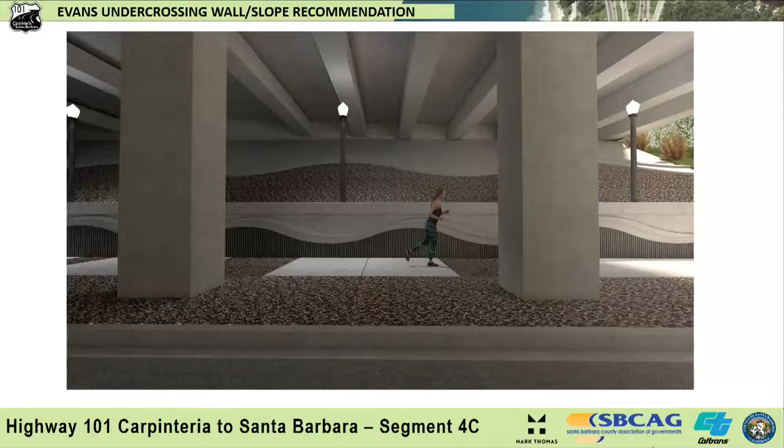So this is a rendering looking at the undercrossing itself. There was a lot of discussion as we were coordinating with the various BARs as we were working through this aesthetic design process. What I wanted to highlight is this shows the overall palette of aesthetic treatments. We are still continuing to work with the community of Summerland on various details of this. So while the detailed aspects, particularly the treatment on the retaining wall, the slope paving details, or even the details for the sidewalk treatment, those may evolve as we work through final design approval, but in general the scope of the aesthetic treatments are represented by these renderings.

Regarding this retaining wall, there is a requirement from Caltrans at a state level that if a retaining wall exceeds a certain height, above 4 feet, there needs to be a railing at the top of that wall to provide safety for maintenance workers. We worked through a lot of details to keep that wall underneath 4 feet tall, and that eliminates the need for having what is a 3-foot railing on top of there. So what's shown here is a 4-foot wall with no railing. You can just imagine what that would be if we had a 3-foot railing on top of there. And that was something that was supported through the BARs.

Similar to the Padaro Lane structure, we did work through lighting analysis for the use of this particular road and this area at night. It's a little different than at Padaro in that this does have more active pedestrian traffic in the evening. So what's shown here are 3 different views: this is looking towards the ocean, this is underneath the structure, and this is looking back towards the Summerland community. You can see that there's areas where there is uniform light, but then there's also higher lighting, which represents more of that pedestrian scale lighting to provide for a safe and visible pathway through there.

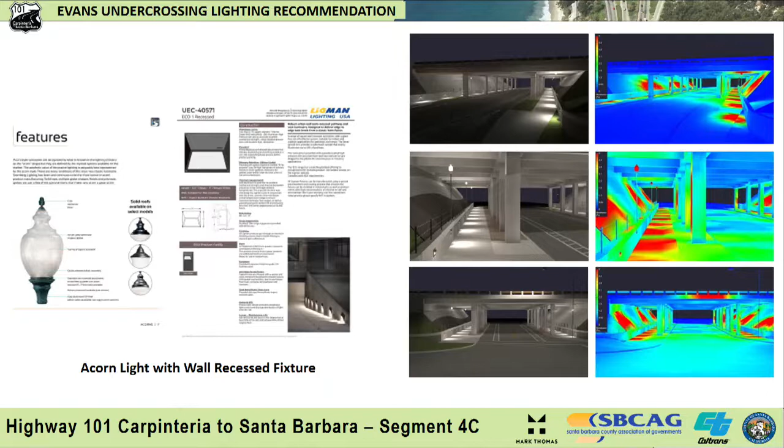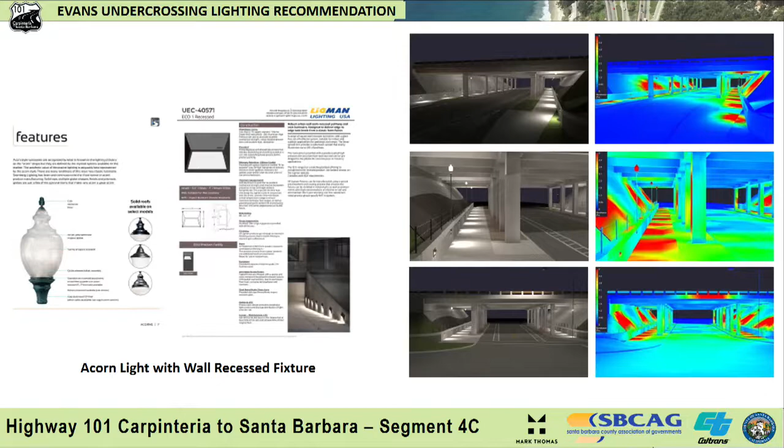Working through the design, it was determined that we would want overhead lights as well that provide that broad-based distribution of light underneath the structure, but then also having the pedestrian scale lighting to illuminate the pathway. So that's what's being presented: overhead lights as well as in-wall mounted lights that would illuminate the sidewalk.

Through the process as well, there was also a request to allow various opportunities for either art or community identifiers, and we have identified locations for where that could be. Again, as we're looking towards the ocean, right here on the corner, there's an area that has sufficient space for what could go in that location. That hasn't been determined yet, but that's something that we wanted to preserve that space for the community. And now we're on the other side of the structure looking back towards the Summerland community. There's a similar space along the other corner that would be available for either art or some community identifier.

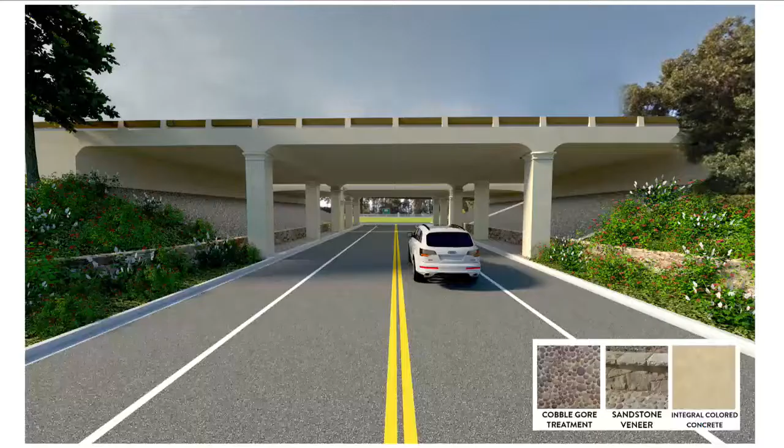So now we are looking at the Sheffield interchange. This is what's proposed for the new undercrossing. This structure, while it's being completely replaced, there are various challenges from an engineering standpoint that really affect how much space we have for the structure. All of these designs for safety are based on certain grades and very strict requirements. So it was great discussion working with the various BARs and the DRT on coming up with a design that enhanced the interchange while meeting all of those engineering requirements.

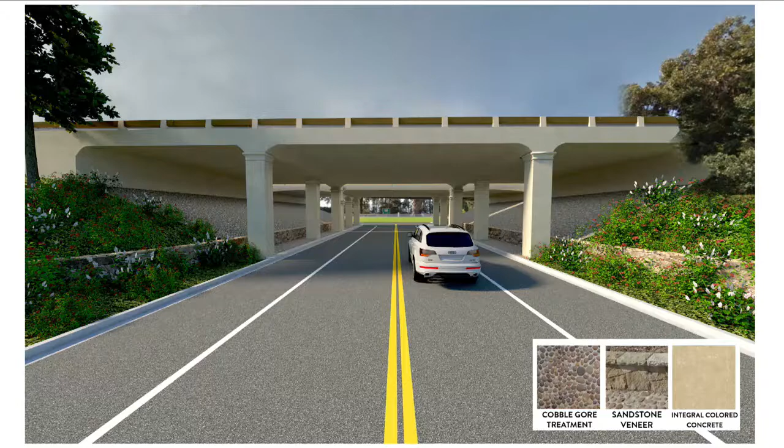So what's shown is an arch structure that's a 3-span structure, and the columns have architectural details to them. The type 80 barrier is, again, consistent along this structure. In addition, there is a little retaining wall that wraps around, coming underneath the bridge into the landscape around that, and that really enhances the planting that Dave went over earlier. And then underneath the structure, the slope paving and the area between the sidewalk and the retaining wall is intended to mimic that contrast surface treatment that Dave went over, which is that cobble texture. So these would actually be cobbles set into concrete and grout, just like the contrast surface treatment area is. The bridge does also include integral color, so it's not going to be a standard gray color. It is going to have an integral color tone similar to some of the other structures.

And with that, that concludes our presentation.

Thank you. That was just a great presentation, and I'm a public works nerd, so I'm really loving it. So this is the time when we ask our commissioners if we have any questions for any of our staff.